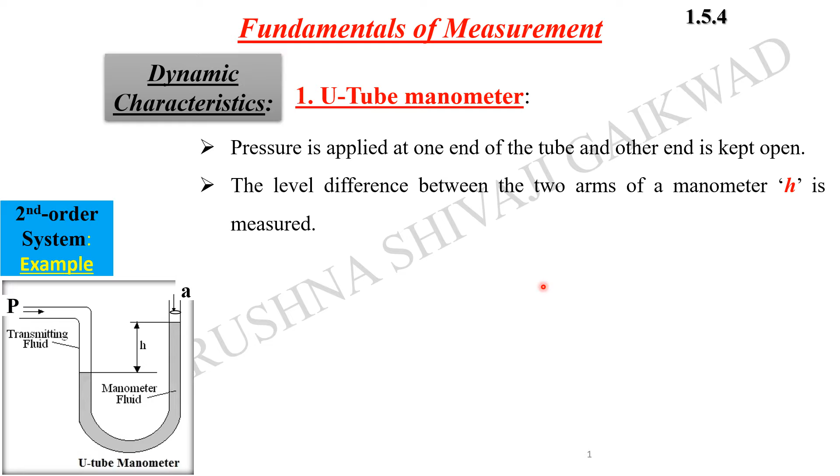Okay, so now the level difference between these two arms of the manometer is h. The difference between these levels of the liquid in the manometer is represented as h. And the pressure P applied from the left hand side is considered as the input, and the level difference h is the output.

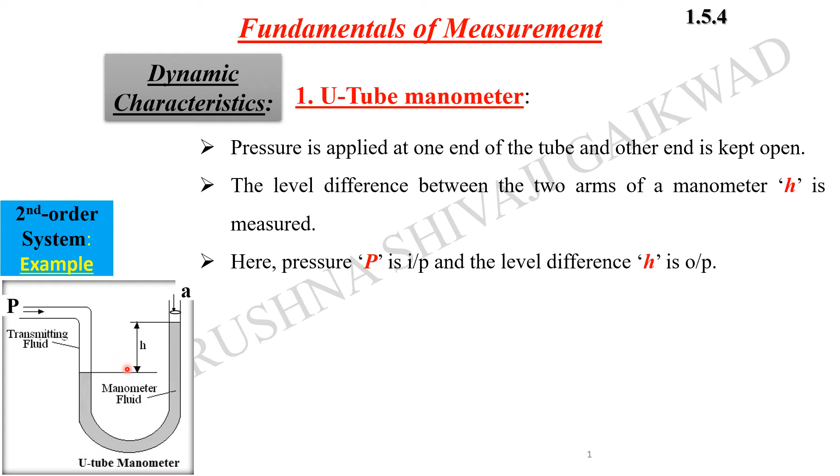So what is the input here, or the changing property? That is nothing but the pressure, and the outcome of it is the level difference in the liquid, that is considered as the output. So we need to derive the expression between the input and the output, the relationship between the pressure and the height within the manometer.

So the force on the liquid column is considered as MA. M is considered in terms of its density, that is rho into LA. LA is its volume and rho is the density of that liquid, times d2h by dt square. So this is the acceleration of the liquid within the tube.

Now this is equated with the force due to gravity, which is h rho g A, the pressure force, which is PA, and the frictional force between the tube and the liquid, that is delta P into A. So these are the forces acting on the liquid moving in the liquid column.

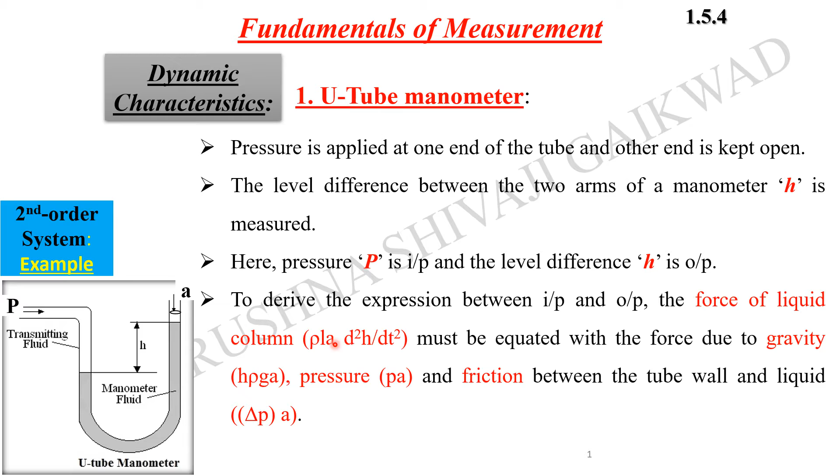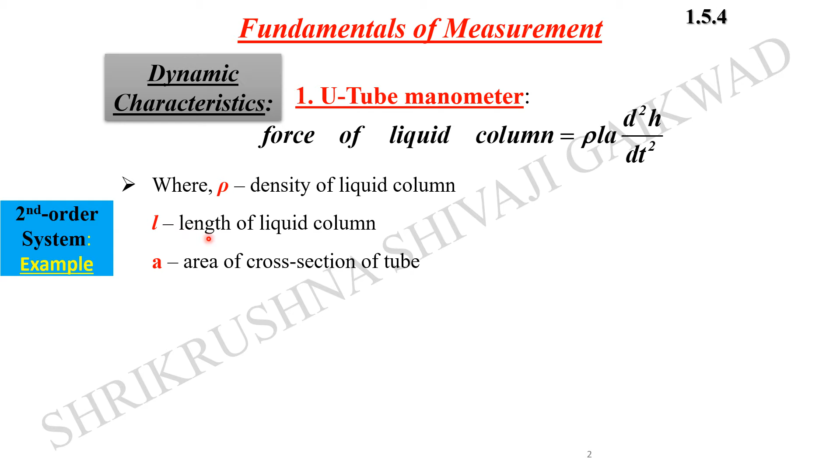Now the force of the liquid column is given as rho L A d2h by dt square, where rho is the density of the liquid, L is the length of the liquid in the column, and A is the area of cross section of the tube. Pressure force is given as pressure into the cross sectional area. Gravitational force is h rho g A.

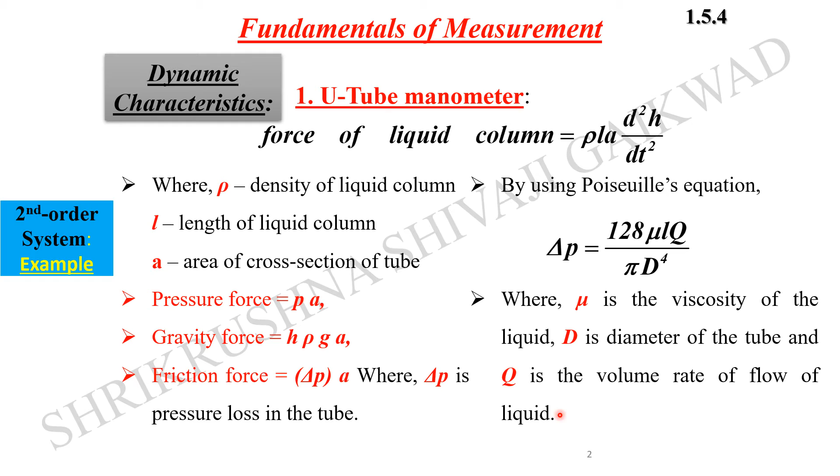Here the friction force is delta P into A, where delta P is the pressure loss in the tube, given by Poiseuille's equation, a standard formula: delta P is equal to 128 mu L Q by pi d raised to 4. Here d is the diameter of the tube, mu is the viscosity of the liquid, and Q is the volume rate of flow of the liquid within the tube.

Now we know that the rate of flow of liquid within the tube is given by Q is equal to V into A. V is the velocity with which the liquid is flowing, that is dh by dt, because height is the only parameter changing with respect to time, and the cross sectional area A is given by pi d square by 4, instead of pi r square.

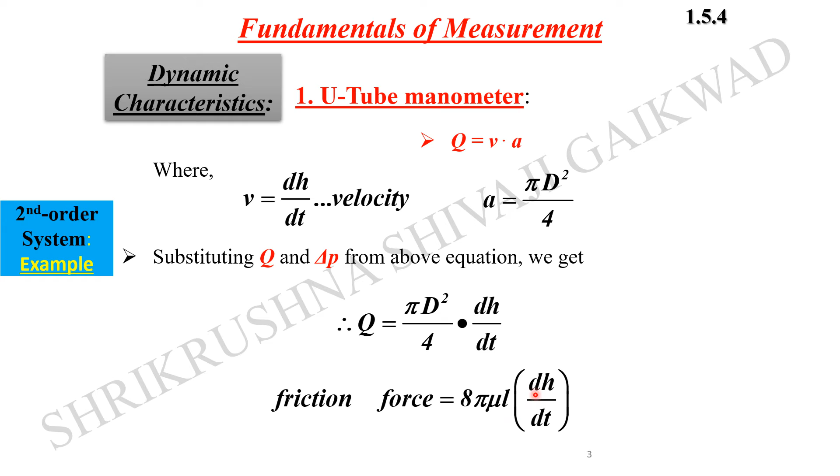Substituting the values of Q and delta P from these above equations, we get Q equal to pi d square by 4 into dh by dt. We just substitute this value in this equation. So the friction force is 8 pi mu L dh by dt. So we have calculated the friction force here.

Now we'll just try to collect all these above equations, and we get rho L A d2h by dt square, which is equal to the pressure force minus h rho g A. This is the liquid force on the liquid column, and this minus 8 pi mu L dh by dt. This is because of the flow rate force which is there.

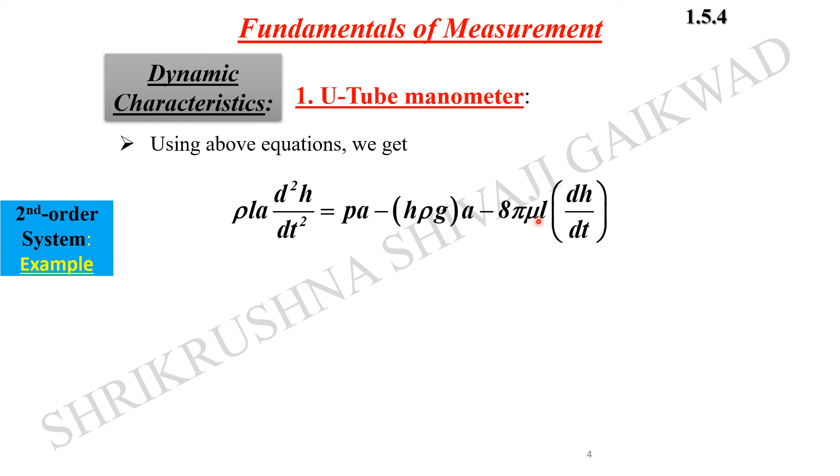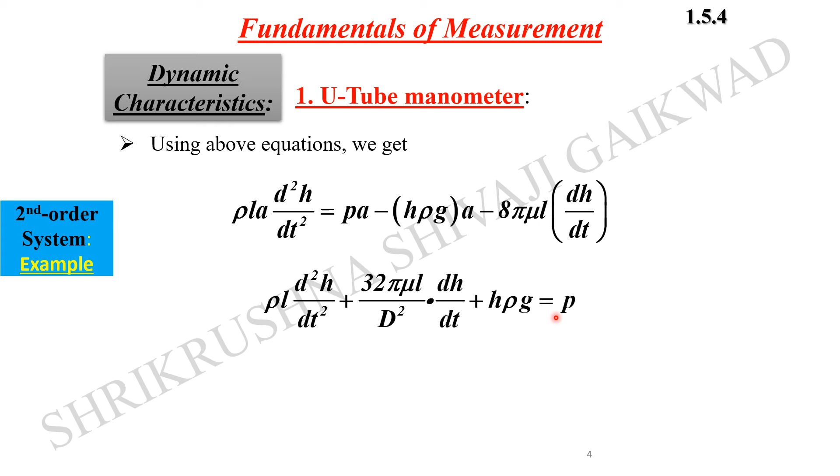So just rearrange the terms and rewrite the equation with the left hand side as a function of h, and on the right hand side the constant, the pressure p. So rho L d2h by dt square plus 32 pi mu L by d square into dh by dt, plus rho g into h, and h can be taken out, and this is equal to some constant p.

From this expression we can consider that the U-tube manometer is an example of a second order instrument, because h is the output and p, the applied pressure, is the input. So we have found the relationship between the output and the input, and this is a second order differential equation. That's why we consider that this is a second order instrument.

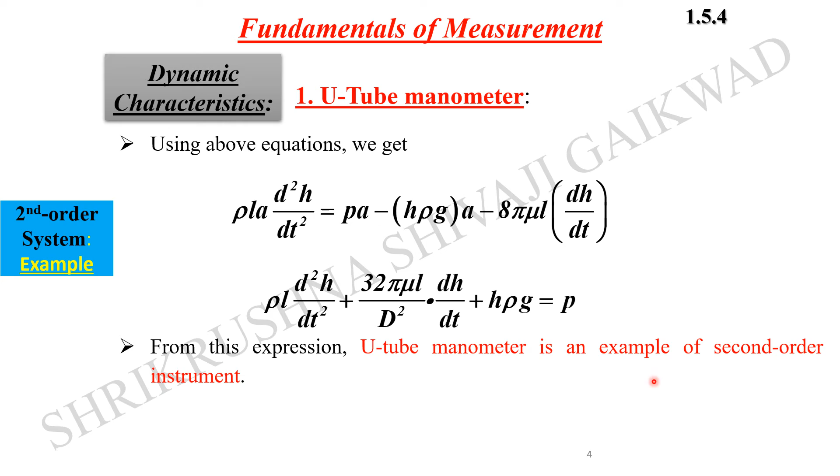Another example we'll talk about is the seismic motion transducers. Seismic: the vibrations happening generally inside the earth crust, or within the earth, have to be detected. Generally we use seismology, right? But it is not only related to detecting the vibrations within the earth, we can use it for

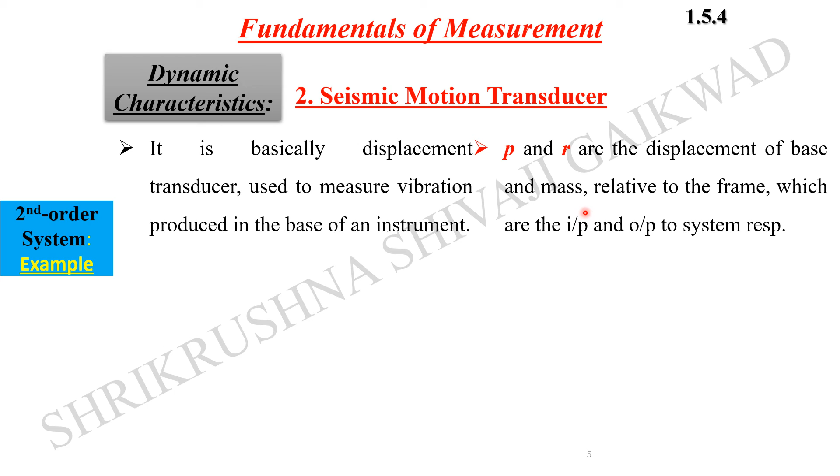some instruments as well. So it is basically a displacement transducer which is used to measure the vibrations produced in the base of the instruments. How much vibration is produced at the base has to be detected, and how it can be avoided while doing some kind of measurements. Here p and r are the displacement of the base and the mass relative to the frame, which are the input and output of the system respectively.

So this is the schematic representation of the seismic motion transducer. A transducer converts one form of energy into another. The construction of this device is something like this: here we can see the scale bar over which the pointer is moving. This is the recorder; the pointer is moving on this record. So this part is the recorder.

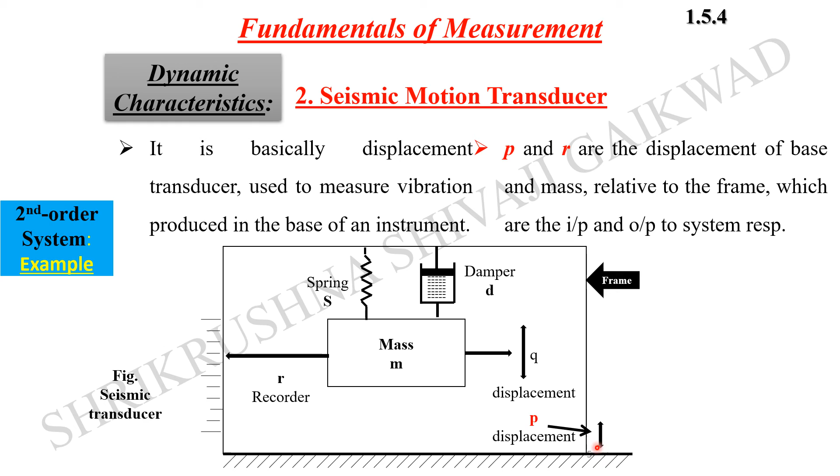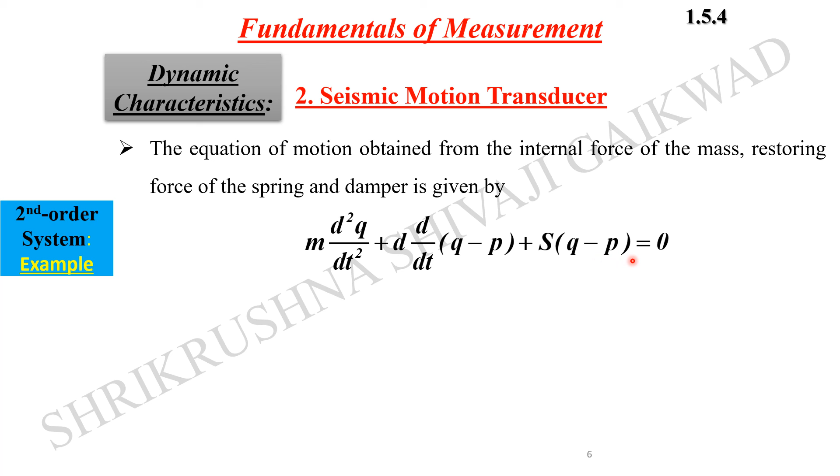The equation of motion is obtained from the inertial forces of the mass, the restoring force of the spring and the damper, which is given as m d2q by dt square plus d into d by dt of q minus p, plus s into q minus p, is equal to 0. Here m is the mass of the body, s is the spring constant, d is the damping constant of the damper. So here d is the damper, and this d is the d by dt. So don't get confused here.

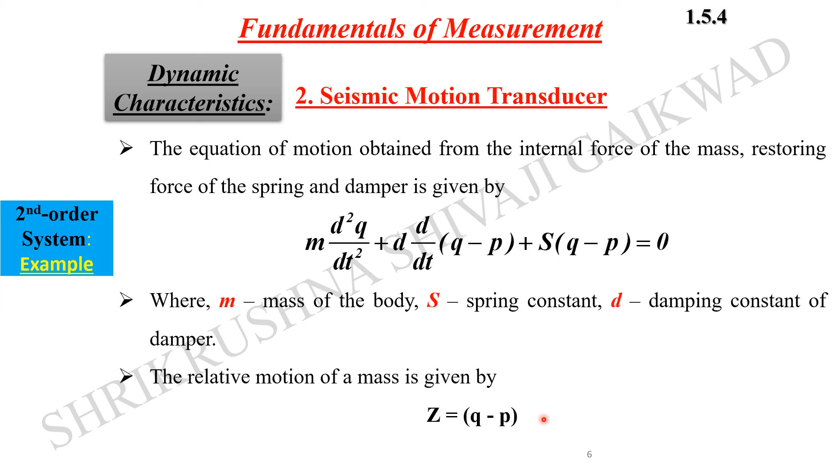So the relative motion of the mass is given by z equal to q minus p. This is another variable we use here instead of q minus p. And m d2q by dt square plus d into d by dt of q minus p plus s into q minus p is equal to 0. So on substitution we get the equation m D square plus small d into capital D plus s into z, where q minus p is z, is equal to minus m D square p.

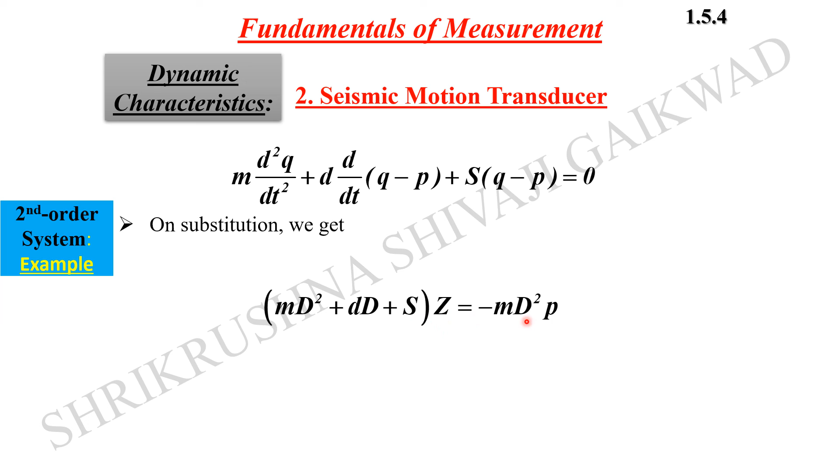So we can have the relationship between z and p. This is the output parameter and this is the input one. So from this equation we can consider the seismic motion transducer an example of a second order instrument.